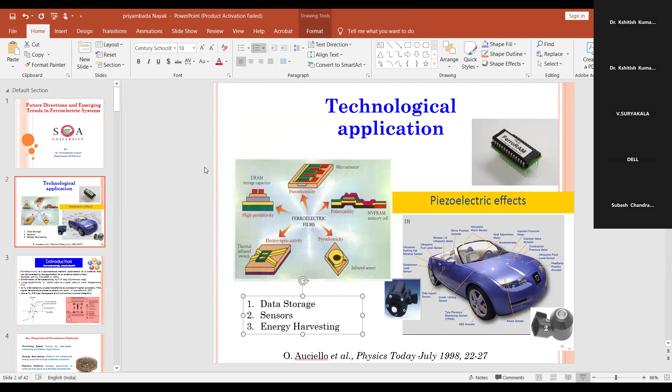So now this is the technological application. The first one here I am showing. Ma'am, sorry for the interruption. Ma'am, please make it full screen. Okay, sorry. Just 1 second. Okay. Thank you, ma'am.

So coming to the technological application, as I said, the ferroelectric materials are basically used for data storage, sensors, and energy harvesting. The first figure here shows the non-volatile ferroelectric random access memory. Previously computers were made such that when you switched off the computer, all the data was gone automatically. But now if we switch off the computer, the data still exists, and the memory is not lost. So that we call non-volatile ferroelectric random access memory. And the second one is used in sensors, in piezoelectric sensors. Later we can discuss what a piezoelectric sensor and a ferroelectric sensor are.

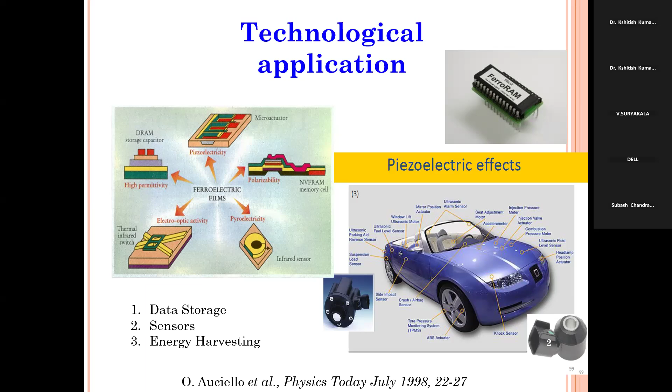So here coming to the introduction. Here I have written that a ferroelectric has a spontaneous electrical polarization that can be reversed by the application of an electric field. That means the ferroelectric material is a type of dielectric material in which spontaneous polarization can exist. So what is a dielectric material? We know that a dielectric material is present in the capacitor, and if we apply the electric field, the material gets polarized. How is it polarized? There are different types of polarization: electronic, ionic, orientational, and so on.

So what is ferroelectric material? We can say that when you apply the electric field, all the dipoles are aligned in the field direction, and if we remove the electric field, the polarization in the material still exists.

So that is called the spontaneous electrical polarization. For that, the memory is not lost, and it is used for the non-volatile ferroelectric random access memory. So how can we confirm the ferroelectric material?

So if we take a material and we apply the electric field, we can get the P-E loop. That loop here is the P-E loop. If we can get such a type of P-E loop, then we can say that it is a ferroelectric material. So on the x-axis we have taken the electric field, and on the y-axis we have taken the polarization.

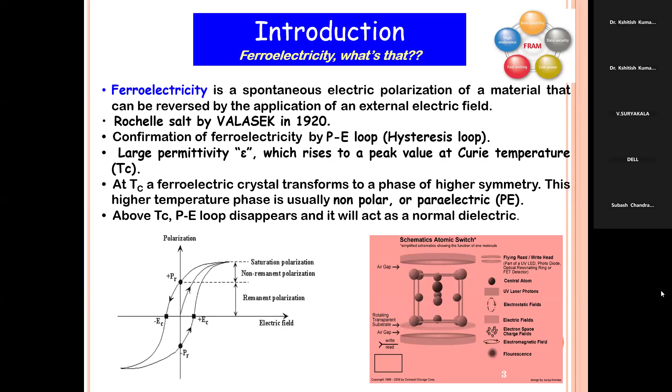So here we can say the properties of the ferroelectric material are the switching speed and the energy harvesting. Thermal stability means how it is sustained up to high temperature, not only room temperature, up to what temperature it is sustained. And the dielectric constant, that means it has a high dielectric constant, and mechanical flexibility, that I have already told.

And domain engineering means how much electric field we are applying so that all the dipoles are along the same direction, and it also depends upon the temperature and the external electric field.

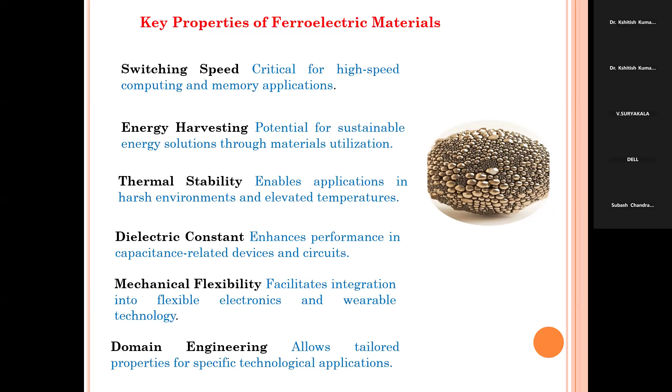So coming to the piezoelectric material: all ferroelectric materials are piezoelectric, but not all piezoelectric materials are ferroelectric. I told that the ferroelectric materials are used in sensor applications. Sensor application means the piezoelectric material, when the polarization is generated by mechanical stress.

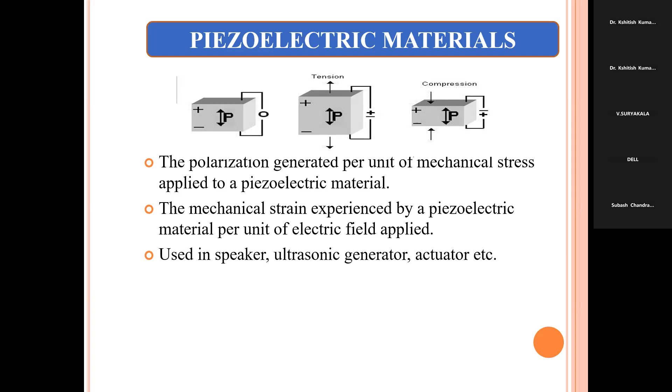I have already told that when you apply the electric field, the dipoles are aligned along the same direction and the polarization occurs. Not only the electric field; if we apply mechanical stress, then the dipoles are aligned along the same direction, and that type of material is called piezoelectric material. Piezoelectric materials are used in speakers, ultrasonic generators, actuators, and so on.

Then the pyroelectric materials. Before that, I have already told that if we apply the electric field, the polarization is along the electric field direction, and if we apply pressure, the net polarization occurs in that material; that is called piezoelectric. So what are pyroelectric materials? Not only the electric field and the pressure or stress; if we apply temperature, the polarization also occurs in that material. That is called pyroelectric material.

So in the recent trend, researchers are taking such materials which have better ferroelectric behavior, so that we can use the ferroelectric material for non-volatile random access memory. And if the same material also gives piezoelectric and pyroelectric properties, that will be an excellent material.

So research is going on in this direction, and day by day people are preparing samples, doing different characterizations, and finding out the piezoelectric constant, the property of pyroelectricity, and how much ferroelectricity exists in the material, so that it can be used in different cases.

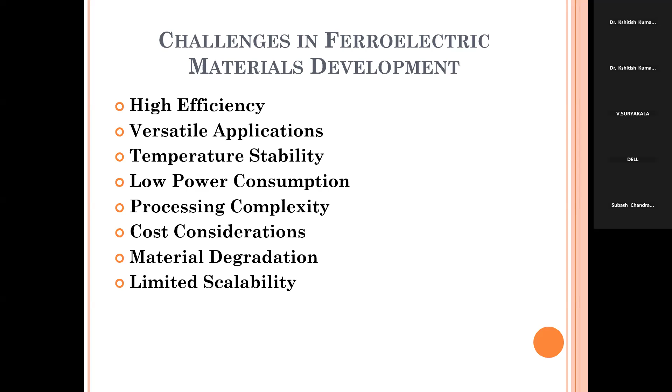So coming to the different types of ferroelectric material, there are basically 4 different types. The first one is the perovskite type material, pyrochlore type compounds, then the bismuth oxide layer, and the tungsten bronze type compounds, organic polymers and ceramic polymers. And these are the different examples I have written.

And all of you know that barium titanate is the best ferroelectric material, and also PZT, PMN; PZT and PMN are the lead-based ferroelectric materials. Now lead is poisonous, and for that, research is going on into lead-free ferroelectric systems.

So with barium titanate, from 1952 people are working on the same material, and at different sites they are doping, substituting different elements to get better properties. And not only the perovskite material; the bismuth oxide layer structure is the best material, and the tungsten bronze type, people are also working on that. And also people are working on the pyrochlore type compounds.

But as so much research is going on in the perovskite material, we are thinking about the bismuth layer structure compounds. We are trying to prepare this type of material, and the different properties, how much ferroelectric property, how much piezoelectric property, what is the dielectric constant of that material, we have also characterized all that.

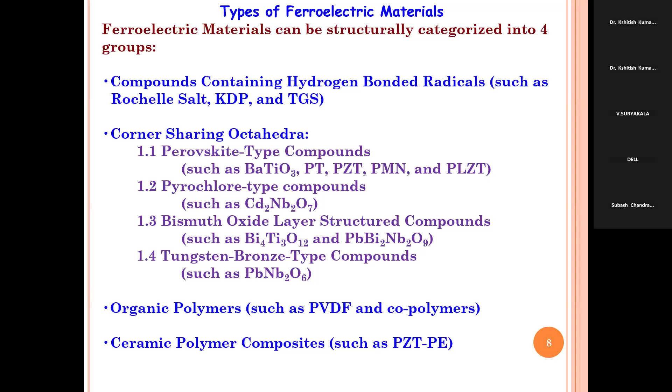So for the bismuth layer structure, the general formula that we have written is the bismuth oxide layer and A(m-1)B(m)O(3m+1). A is the A-site cation, B is the B-site cation, and O is the oxygen. And these materials are also called Aurivillius compounds.

The A-site is 1, 2, 3 valency cations of larger size, that means strontium, calcium, then barium from the periodic table; these are present at the A-site. And the B-site is 4, 5, 6 valency cations, that means titanium, tantalum, niobium.

And why we have taken this type of material: the different advantages. It is fatigue free. Fatigue free means up to 10 to the power 12 cycles the property does not degrade. Whenever you choose a material, you have to choose a fatigue-free one, meaning the number of cycles is more. So this is a fatigue-free material. And low leakage current; if the leakage current is low, we can find good properties.

And fast switching. This is nothing but the perovskite material that I have already told, ABO3 type material, but within the ABO3 the bismuth layer is present, and the bismuth oxide layer acts as an insulating paraelectric layer. For that, it is fatigue free, it sustains up to 10 to the power 12 cycles.

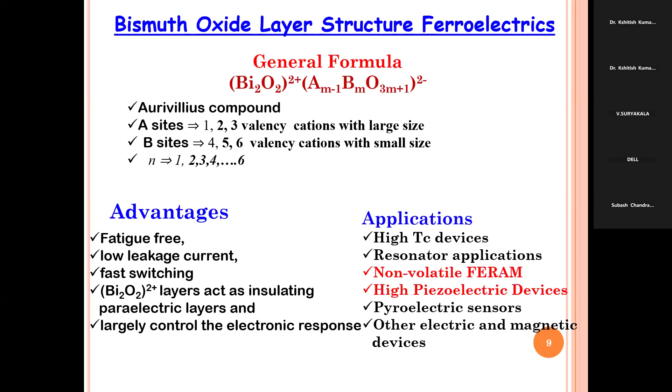So here I have shown some different figures of the bismuth layer structure. In the first figure, the blue one is the perovskite block, and the square type, the vacant one, is the bismuth oxide layer. In the first figure, this one is the bismuth oxide layer, and this is the perovskite block. As one bismuth oxide layer is present, this is called the one layer structure.

In the second figure, this is the bismuth oxide layer, and this one is the perovskite layer. So the second one is the two layer structure, this one is the 3 layer structure, this one is the 4 layer structure, and this one is the 5 layer structure. If there are more layers, then it has the fatigue free property, or the property is good for the material. So this is the 5 layer structure.

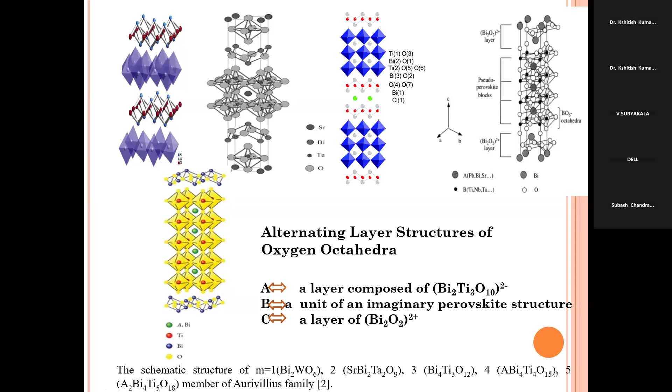On the left side I have written the compound name, and M is the layer, 1, 2, 3, 4, 5, and the next one is the dielectric constant, and next is the transition temperature. D33 means piezoelectric constant, P is the polarization, and the number of cycles is written. If we compare this table of 1, 2, 3, 4 layer and 5 layer, we got strontium bismuth titanate, the red one here, and this is the 4 layer structure.

The room temperature dielectric constant is written here, and the transition temperature is 530. That means the material can sustain its property up to 530 degrees centigrade. Our room temperature is 25 degrees centigrade, but the material sustains up to 530 degrees centigrade.

And the piezoelectric constant: I told you how we can find experimentally that it is a piezoelectric material. That means we can find out a D33 value. If the D33 value is more, the material is a good piezoelectric material. The D33 value I got here is 15. The polarization is not mentioned here, but after performing the experiment we have conducted all those things. And the number of cycles, as I told, it exists up to 10^12 cycles.

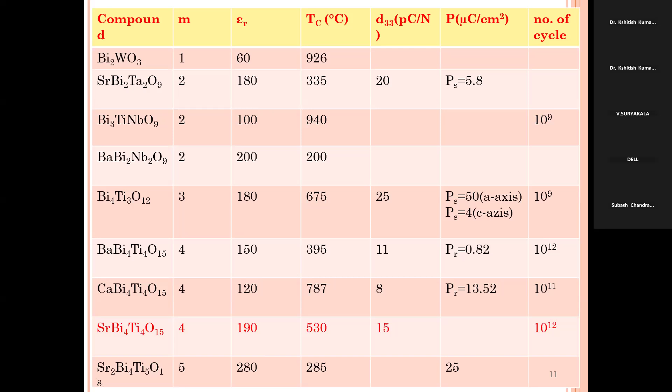So among the different types of material, we have chosen the 4 layer structure, SBT, strontium bismuth titanate. As I have already told, this is a 4 layer. First, the merits of the material: it is lead free, and lead is poisonous. Environmental people have banned lead, so we cannot use it in many materials. Next, it is fatigue free up to 10^12 cycles. The D33 value is 15, the coercive field is 52.31, and the polarization is 13.52 microcoulomb per centimeter square. High TC, as I have already told.

Next is written the tolerance factor and orthorhombic distortion. Why have I written the tolerance factor and orthorhombic distortion? Because whenever we are conducting the experiments, the tolerance factor is most related to the electrical property, and orthorhombic distortion is also related to the electrical property. For that, I have mentioned here the tolerance factor and the orthorhombic distortion.

And this material is used in different applications, as I have already told, high TC devices. Now this material is used in aerospace engineering also, and recently we have published one paper based on that material, which is used for aerospace, meaning aircraft or aeroplanes.

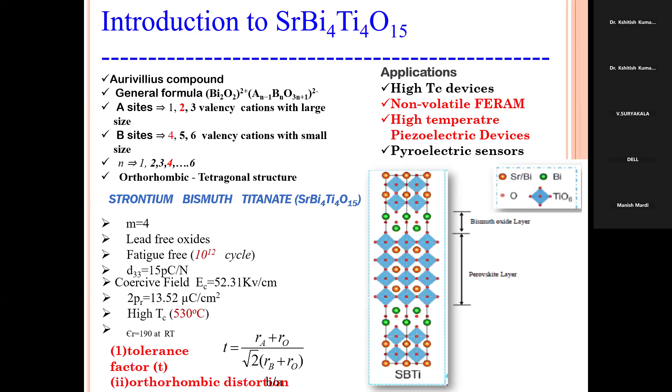So coming to the different characterization part, we have prepared the sample. Not only SBT have we prepared, we have modified it on the different sites. Strontium bismuth titanate, as I have told, is nothing but an ABO3 structure. In the A site, strontium and bismuth are present, and in the B site, titanium is present.

First of all, we have prepared the sample, and not only SBT, we have modified the A site and the B site. Instead of strontium, we have doped barium, calcium, and on the bismuth side, as bismuth is 3+, we have changed this to lanthanum, gadolinium. And in the titanium side we have also substituted niobium, tungsten, like that.

And here I have shown only the good property that I got with tungsten when we placed it in the titanium side. Titanium is 4+, but tungsten is 6+. Whenever we substitute tungsten in the titanium side, the material gives better properties compared to pure SBT.

Coming to the different characterizations, first we conducted the structural characterization. Then we conducted the electrical characterization, and also the P-E loop, to see whether it's showing ferroelectric behavior or not, what is the saturation polarization, what is the remnant polarization, what is the coercivity. For that we have conducted the P-E loop.

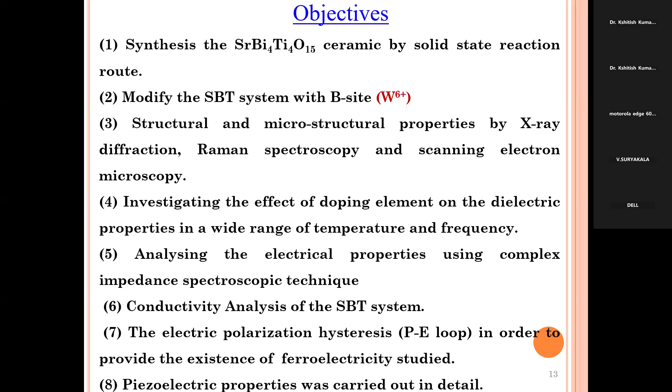And how do we confirm the material is formed or not? After the calcination, we have done the XRD analysis. Let me explain first, then I will explain what XRD result I got. After calcination, we take the XRD, and then we mix the samples again and make pellets, so that we can conduct the electrical characterization.

So here this is the XRD data, and from that XRD data we found that pure SBT is formed. How do we know that it is pure SBT? Some JCPDS files already exist, and the peaks formed at 31, 30, 34, 35 all match the JCPDS file.

So we confirm that the pure SBT is formed. And not only have we prepared the pure SBT, as I told, we have doped tungsten in the titanium side. And in the titanium side, we have taken different compositions, that is 0.02. Instead of, suppose, the titanium is 100%, we have taken 2% of the tungsten, 2, 4, 6, 8, 10, like that way.

So the tungsten percentage is 0.02, 0.04, 0.06, 0.08, and 0.1. This is the tungsten percentage we have taken. That means we have prepared 6 samples, pure SBT and also the tungsten doped samples of different concentration. Then this is the XRD.

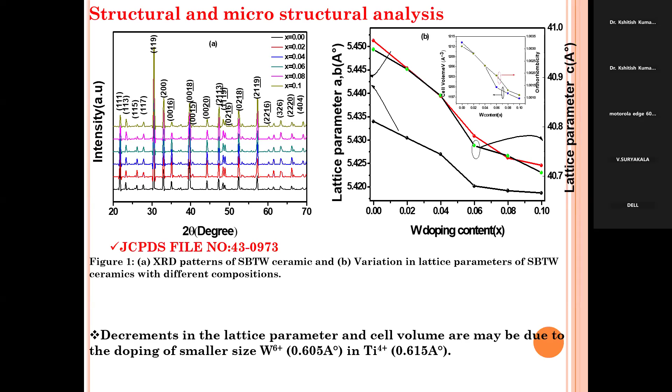We have done the structural characterization, but our aim is not only to prepare the material, but how it is applicable in different fields. So for that we have characterized it more, and how the structural characterization is related to electrical characterization, that also we have to find out.

So this figure is the SEM figure, scanning electron micrograph of the pellet samples. From that also we got that in the doped samples, the grain size gradually decreases. The first one is for the SBT, but in the latter ones the grain size gradually decreases. So we thought that maybe due to the smaller ionic radius of the tungsten compared to the titanium, the grain size gradually decreases.

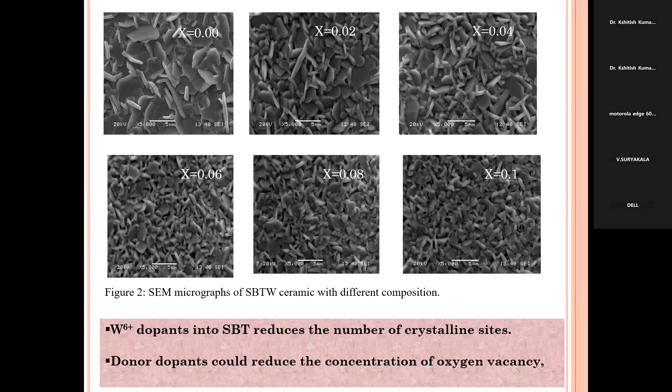So coming to the dielectric study, we have taken the dielectric study in an LCR meter, and we have plotted the graph of dielectric constant with respect to temperature, and we got the peak point, that is called the transition temperature.

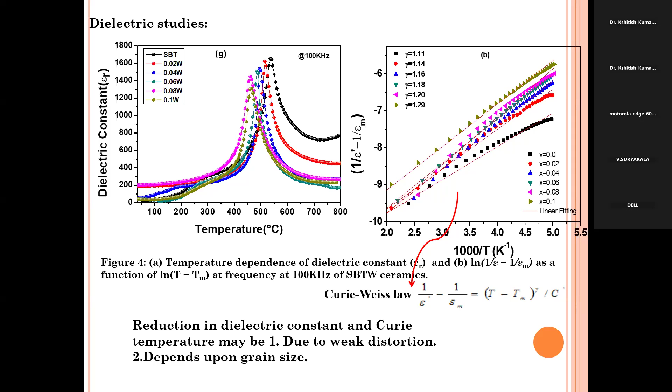For that we have to calculate the... means one advantage we got, that is the relaxor behavior. Relaxor means we can use the material not only temperature dependent, but also frequency dependent, means if the material gives the better property in the frequency range, we can say that it is a relaxor material, and we can use it as a relaxor material.

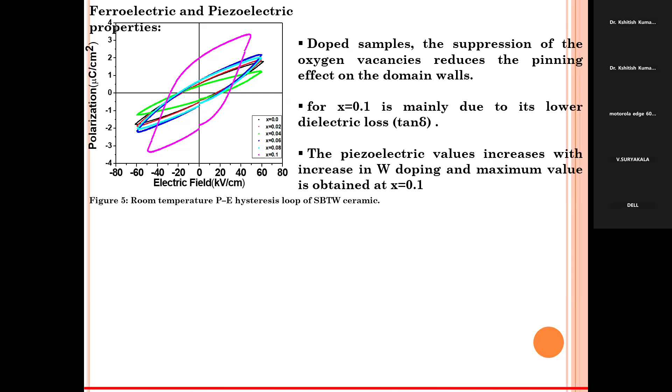So now we have two advantages: the relaxor property is good, and the second one is a better ferroelectric material, means polarization is more in the doping material, and it will be better for the 0.1 compound. Then we have to find out the relaxation, means impedance spectroscopy of the material. Impedance means what is the resistance. I told that grains and grain boundaries are there, and these are related to the resistance and to the conductance of the material.

We have to find out the real part of the impedance and the imaginary part of the impedance. Here we have shown 0.00 and 0.1, and what I got, the impedance of the doping material is more, means the resistance is more, so we thought that the conductivity may decrease, and due to the less conductivity the material gives the better ferroelectric property.

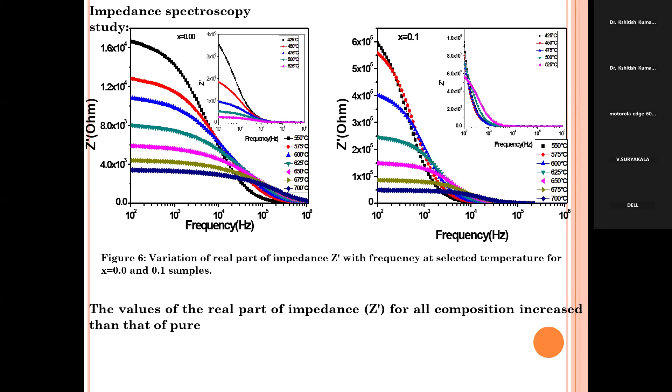So we have taken from room temperature to 700 degrees centigrade, and we have found the resistance of the grain and the grain boundary, how it is related to the structural property, the ferroelectric property, and the piezoelectric property. All the characterization we have done, and we have correlated the structural parameters with the electrical property.

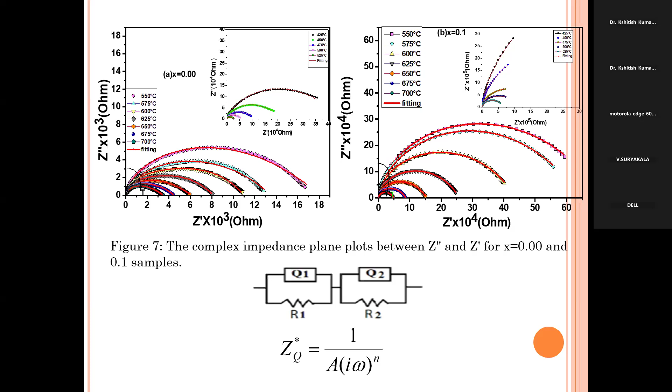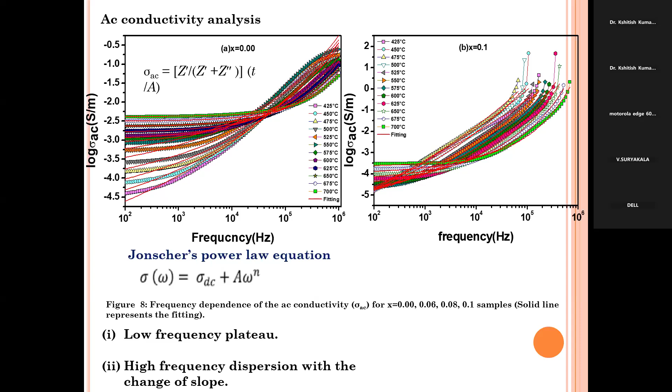After that, we have taken the AC conductivity. As I told, in the doping material the resistance is more, so the conductivity is less. There are different equations, and we have fitted them with Jonscher's power law, from which we can calculate the DC conductivity and how it is related to temperature. So we have found the grain resistance, grain boundary resistance, the AC conductivity and DC conductivity of the material, and how they relate to frequency and temperature.

After conducting all the experiments, we have found the piezoelectric constant of the material. Generally people take the piezoelectric constant at room temperature, but for high temperature piezoelectric application, we have found the piezoelectric constant from room temperature up to 700 degrees centigrade.

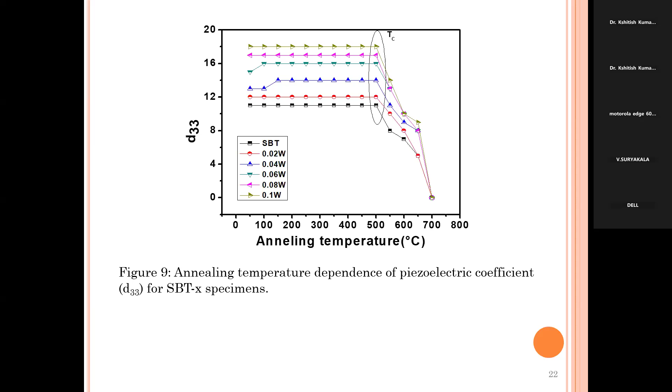As I have already told, recently we published a paper on high temperature piezoelectric sensor application for aerospace engineering, and we proved that this material can be used for aerospace engineering. And these are the conclusions. The grain size decreases from the SEM study, and the dielectric constant gradually decreases. From impedance, we found the grain resistance and grain boundary resistance, correlated them with the conductivity, and also correlated the conductance with the resistance values.

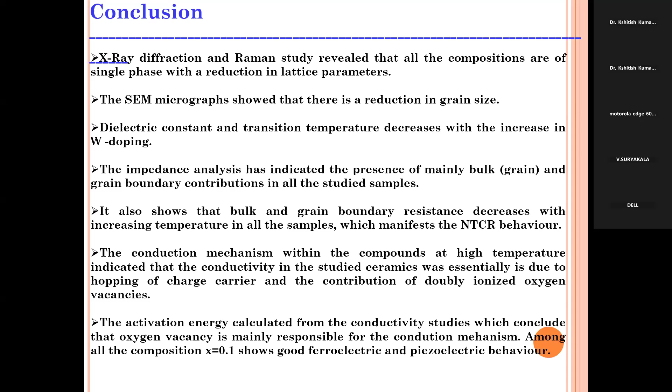And finally we find out the ferroelectric constant, the dielectric value, and the piezoelectric value of the material up to high temperature. So this is the next generation ferroelectric material. This material I have chosen, we have prepared in bulk. So the next challenge is to choose a material and prepare ultra thin ferroelectric film for devices. For device application you have to prepare the ferroelectric material as a thin film. And the second one is how it is biocompatible.

Recently I have seen 2 to 3 papers in which nanoparticle barium titanate material is used for cancer disease. So not only this material, but how ferroelectric materials are applicable for cancer treatment. And we know that nanoparticles are the best example; if we prepare nanoparticles it gives better results. So for biocompatible ferroelectric medical application, if you are preparing a sample for medical application, that will be better.

And the third level is all organic ferroelectrics for sustainability. And the fourth level is, whenever you prepare the material, lead free is the best one. So you have to prepare it and compare with the lead based material. And the fifth one is multifunctional ferroelectric hybrid composite material. Multifunctional means, as I told, whenever I have chosen my material, that material shows different properties. One material can be used for different applications; that is called a multifunctional ferroelectric material.

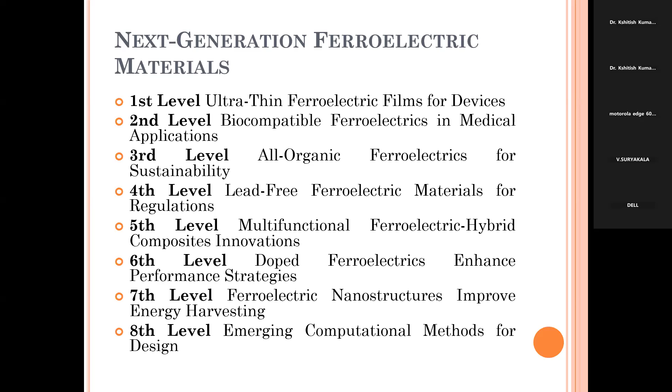And the sixth level is doped ferroelectrics to enhance performance. Not only do you prepare the same material, you have to dope it; in the periodic table so many elements are there, you have to try them. And if it gives better properties, you can also show that. And the seventh one, ferroelectric nanostructures improve energy harvesting. This is the recent topic, energy harvesting. And the next level is emerging computational methods for designing. Now AI is the emerging trend, and people are using AI to find out which gives better ferroelectric or multifunctional properties. So these are the references.

Okay, so these are the references. Hello, Dr. Kshitish. Yes, ma'am. So this is all about the recent topic of ferroelectric materials. If you give me 15 more minutes, then I will describe something different. Sure, ma'am. You have time, sir. Okay. So these are the references.

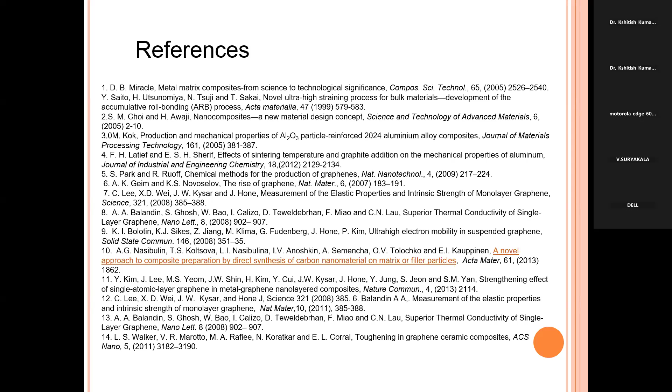So this topic I have already covered, the ferroelectric material and how it is used in different sectors. Research is a very big platform. We have not only prepared ferroelectric multifunctional material, but also aluminum metal matrix composite for day-to-day life. We have studied how graphene affects the mechanical and conducting properties of aluminum. In most cases we see aluminum used in our doors and windows.

So as we know, aluminum is the third most abundant material in the Earth's surface, at 8.1%, and it has a high strength-to-weight ratio and is lightweight. For that, aluminum is used in aluminum slides, aluminum doors, aluminum windows in different sectors. It has high electrical and thermal conductivity, is non-magnetic and non-sparking, and insoluble in alcohol and water.

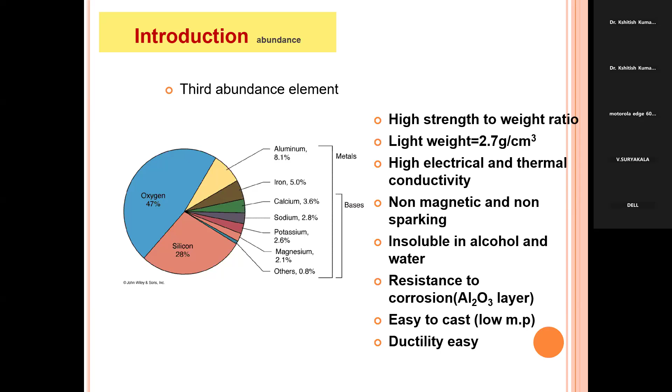It also has corrosion resistance. Whenever you take aluminum, it is not like iron; an aluminum oxide layer is formed on the aluminum, so it protects it, and for that it can be used for a longer time. It is easy to cast, and ductility is easy. So for these properties, aluminum is used.

We are using aluminum foils, electrical wires, food packaging, cooking pots, the backside of mirrors, decorative components, automobile bodies, engine parts, and so on. However, the application of pure aluminum is very rare compared to its alloys. So we thought that not only aluminum alone, we also have to make a metal matrix composite system.

This is the limitation of aluminum: a low melting point, 660 degrees centigrade, which restricts the maximum temperature at which it can be used. Moreover, it is very soft, which restricts its application in automobile sectors and aircraft. In the automobile sector, stronger materials are required, so we are preparing an aluminum metal matrix composite so that it will be stronger and we can use it in the automobile sector.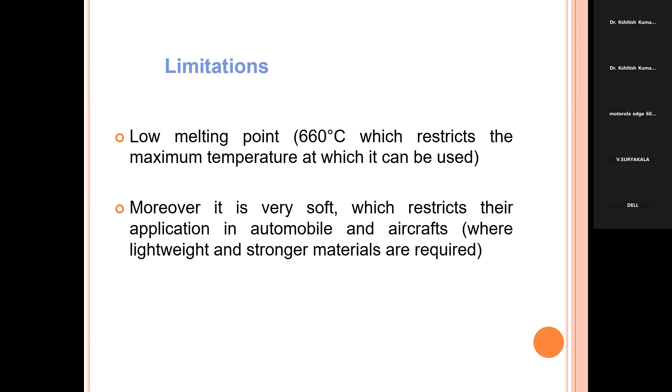Keeping this in mind, we have prepared the aluminum metal matrix composite. All of you know that graphene is now used by chemistry people, physics people, mechanical people, because it has good properties. Graphene has high electron conductivity, its mechanical properties are also good, and it is the strongest material. If we take 1 gram of graphene, it will spread over a whole football ground, as you have all read in the books.

It has high thermal conductivity and electrical conductivity. For that we have taken graphene and prepared the aluminum metal matrix composite for automobile applications. And not only for automobile applications, but to enhance the thermal conductivity, we have characterized the thermal conductivity and made a prototype.

All of you know that in the pressure cooker, the lower part is aluminum. We have talked with Prestige, and using the aluminum graphene composite we prepared, we have made one prototype pressure cooker. Then we found out the thermal conductivity, which we have already done, and we have filed a patent on that.

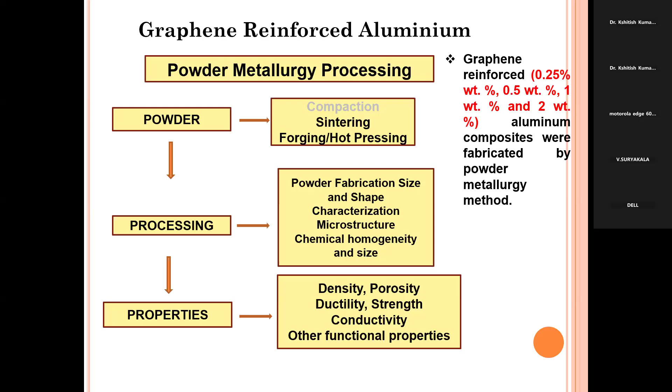But as this is the metal, we have taken the 10:1 ratio for the stainless steel balls. So in the jar we have put 10 grams of the aluminum and graphene powder, and put the balls, and we have put it in the ball milling machine for 10 hours, and the rpm is 300 rpm, and ball to powder ratio is 10:1.

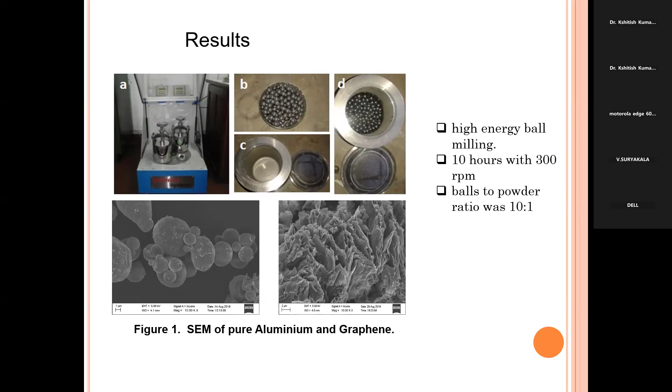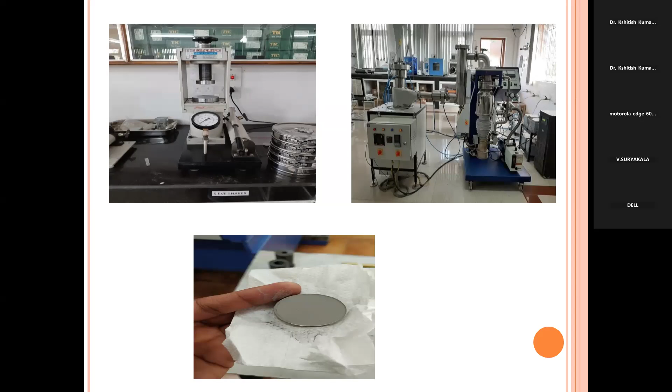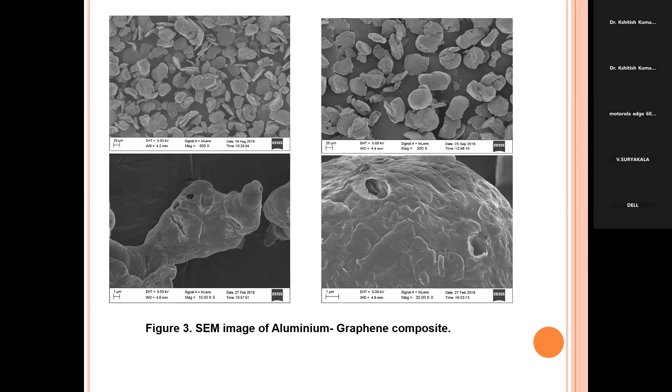And he is one of my friends, Dr. Kedar. I have prepared the sample by the powder metallurgy method, but he has taken the raw aluminum rod from Nalco, and he has melted the aluminum. Just I told that the melting point of aluminum is 660 degrees centigrade. So he has heated the sample above 660, so that the aluminum is melted and a liquid is formed.

In that, he poured the graphene powder in different percentages. Then after that, in different steps, he has taken that liquid to different forms, and the last one is the pellet or the rod shape is formed.

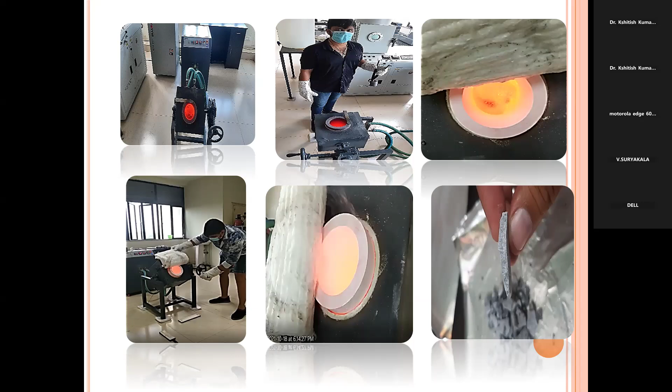So then you have to calculate what is the density of the metal. If pores are present in the metal, the metal property will be degraded. So for that, we have done the density measurement and also the micro hardness, what is the hardness of the metal. We have prepared the metal for automobile application, in the automobile sector. For that, the hardness is the most important thing.

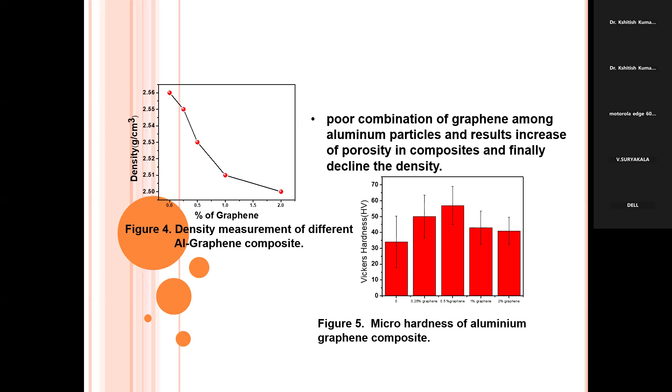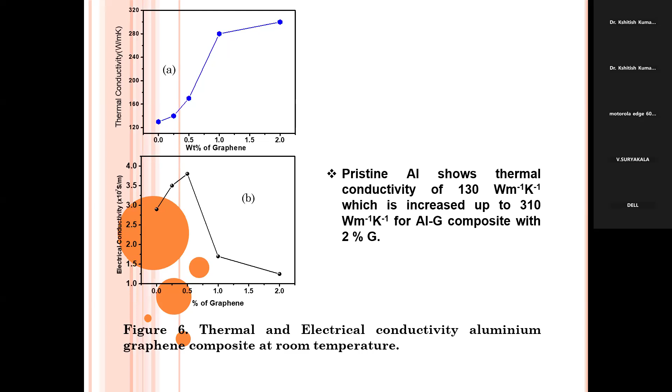So coming to the conclusion, we have prepared the aluminum metal matrix composite by two different methods, one is the powder metallurgy method, and also the casting method. And the SEM figures, the density measurement, the UTM measurement, thermal conductivity, electrical conductivity, all that we have related with the structural analysis. And we have also made one prototype of the aluminum metal matrix composite for the automobile application.

So for this one, the paper is published, but till now we have not filed any patent. But for the thermal conductivity, we have filed, and my patent is also already published.

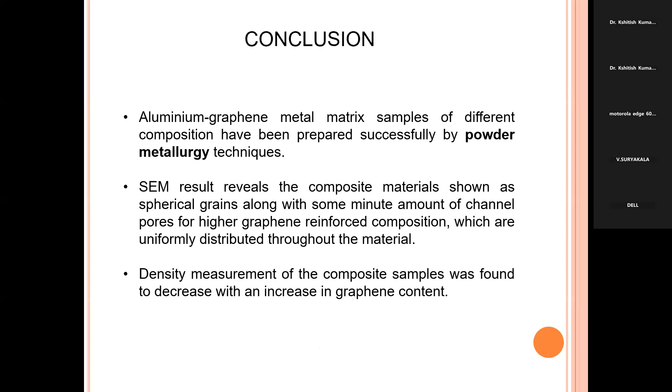Dear ma'am, how do I obtain a JCPDS number from any XRD peak? Okay, so that JCPDS file is also available in the database. So in the XRD, suppose a Rigaku XRD is there, they have given one CD file, and in that CD the JCPDS file already exists.

And suppose the XRD is connected with the computer. The installer has already installed that CD in that system, so that suppose I am getting a peak. Suppose at 30 the peak is coming, so you have to find out whether the 30 peak is related to iron or to strontium. That we can find out in that system.

Ma'am, Sankhamitra is asking, why are hafnium oxide based ferroelectrics considered a breakthrough for CMOS compatible ferroelectric systems? Why? Why are hafnium oxide HfO2 based ferroelectrics considered a breakthrough for CMOS compatible ferroelectric systems? Ma'am, actually hafnium is a rare earth element. Okay, generally the rare earth elements give better properties, I think so, but I have not worked on that terminology, that CMOS, I am not clear about that system.